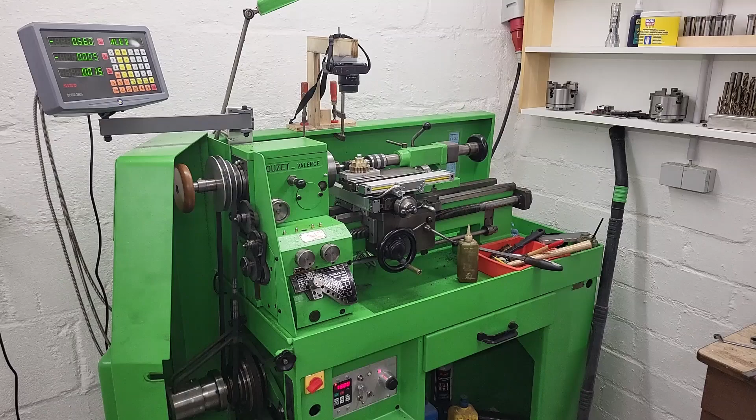This is a Crouzet Valence TC125 lathe. It is really nicely made and I enjoy working with it. I could not find many videos on the lathe on the internet, and most of the owners seem to be located in France. And the internet forums in which there is information are usually in French, which I do not speak.

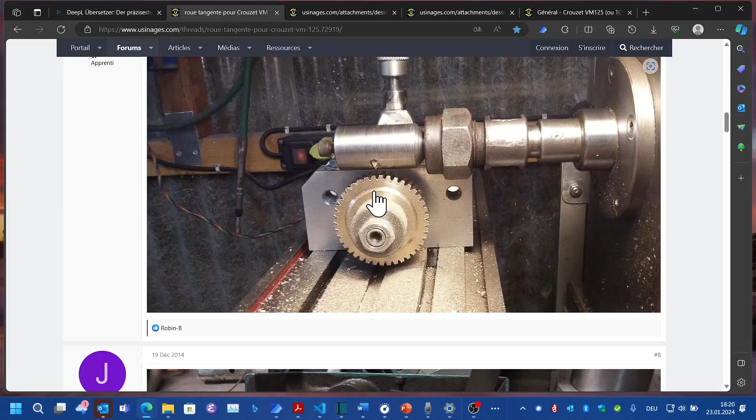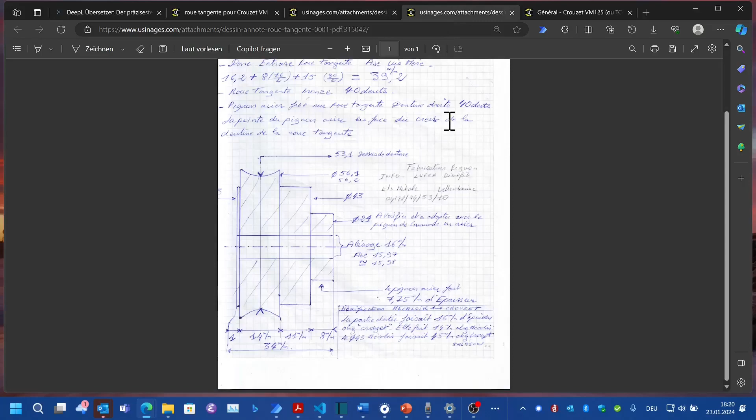When I read through the internet forums, it became clear to me that there is one weak spot of the machine: the gear driven by the lead screw. It is a replacement and alternative construction to a typical half nut and has advantages during normal work. But it takes all the load, no matter whether turning the hand wheel of the y-axis or cutting with mechanical feed. And here my exercise started.

I decided to build my own gear to have a spare part, just in case of a failure in the future. Yes, and this is the result. But it was a long trip, and I want to show the details just in case you also need or want to do the same thing for your lathe.

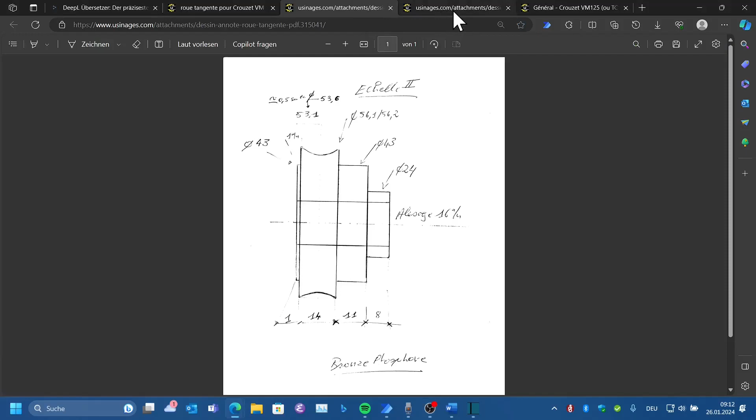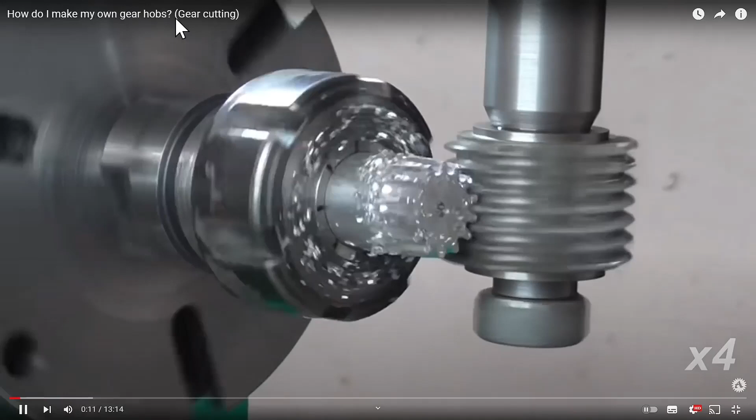I never did gear cutting before, and the first part of the work was the planning and understanding of the different aspects of the task. There is plenty of information on the processing and the exact dimensions in the forum, and I decided to start with this information provided by the user JPC14 and especially Freddy007. These were really useful. Additionally, I watched some videos on the geometry of gears and also read different documents on the same topic to understand gear modules, pitches and all the nice technical terms involved.

I also tried to find a commercially available solution, but the worm gear in the Crouzet Valence is clearly a non-standard gear. Overall, I understood that for a smooth run of the gear, there are many things to obey. Especially the information from the video channel Andy's Machines, which I will link in the video description, helped to understand the differences of the different techniques.

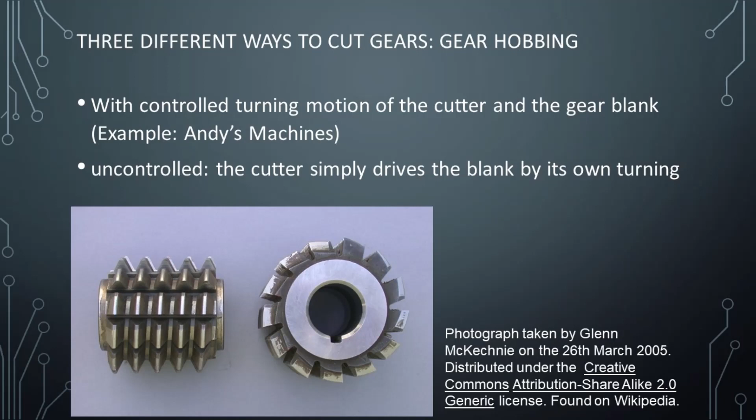Basically, there are three different ways to cut gears. Straight cutting using a manually created cutter or a commercially available cutter, and the gear blank in that case is rotated by a rotary table or using an existing gear, like in the method of JPC14 on the forum.

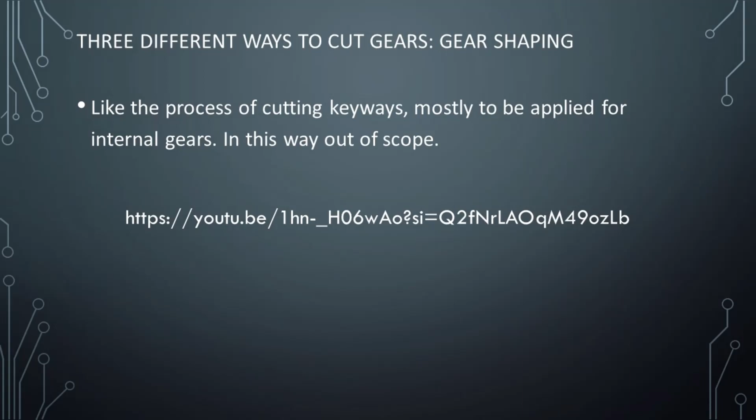Gear cutting using a hob. This can be done using a controlled turning motion of the cutter synchronized with the gear blank, like in the setup used in Andy's Machines, or in an uncontrolled manner where the cutter simply drives the blank by its own turning. And finally, gear shaping, which is a similar process to cutting keyways or internal slots. This is mostly applied for internal gears and in this way out of scope.

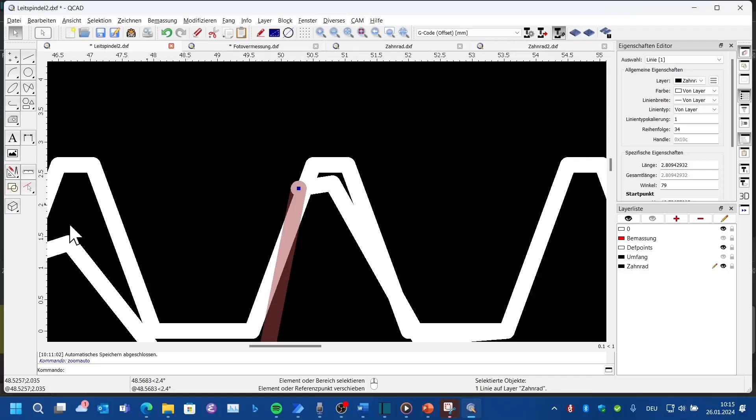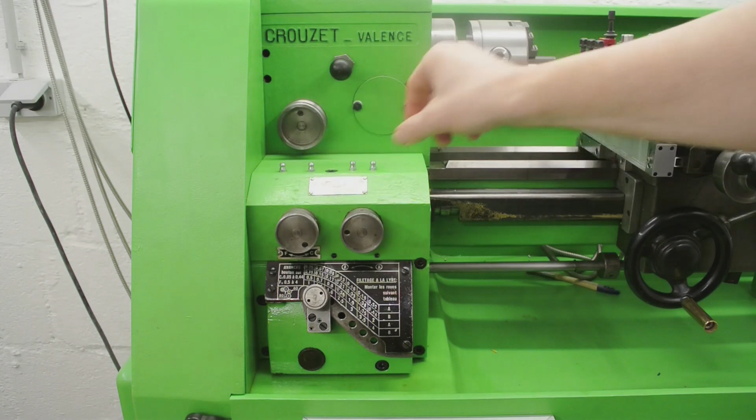From the theory, it becomes clear that gear cutting with a simple straight cutter having the complementary shape of the lead screw will lead to a non-usable gear. The result would be a rough feeling on the hand wheel, or turning will simply be impossible. The reason is that the gears will touch the lead screw when entering and exiting it. You can see this in this picture, where the tip of the worm gear exceeds the limits of the lead screw. Hence, the teeth of the gear have to have not a simple regular, but a complex, partly rounded shape.

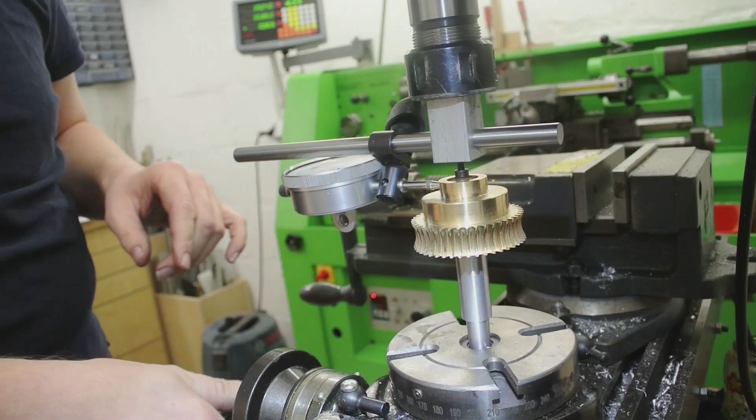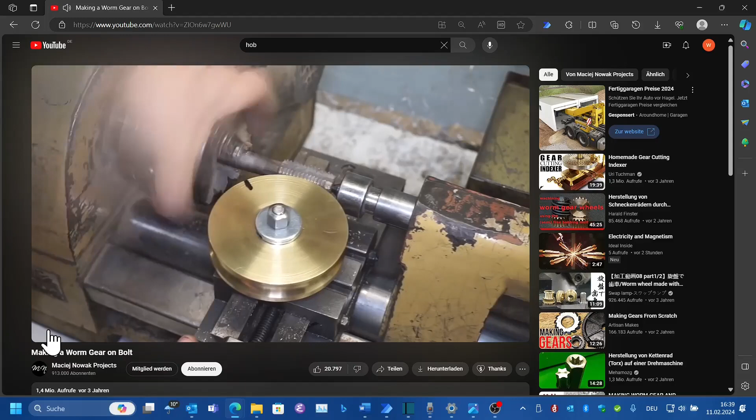So I needed to decide on the technique to use. Building a gear hob seemed to be possible, since the Norton gearbox of the Crouzet Valence allows cutting a thread of 4 mm per revolution, exactly the same as the lead screw of the lathe. Building a straight cutter also seems to be no real issue. Cutting a gear with the gear hob requires hardening the hob, so I needed a technique to harden the steel of the hob. I have only a sloppy rotary table and I did not want to buy a proper dividing head. Also, I did not want to build an electronic drive for the same.

Cutting the blank directly with the hob seemed to be a bad decision. The material of the gear is expensive and the hob needs to be in synchronized motion for an exact result. Hence I decided to go with a two-step process. A straight cutter is used to cut the 40 grooves into the blank, leaving enough material to be removed by the hob. But the straight cutter gives a clear position for every tooth, respectively groove, of the gear, so that there is no problem with inexactness when the hob is used to form the exact form for the teeth. And since I do not trust my sloppy rotary table, I went with the technique of JPC14 to cut the grooves on the milling machine first.

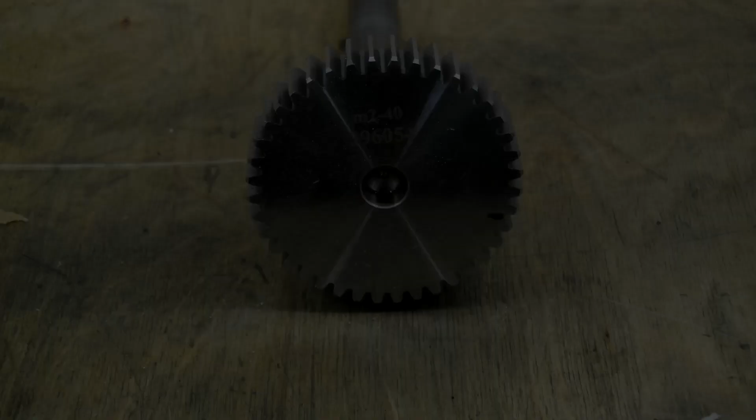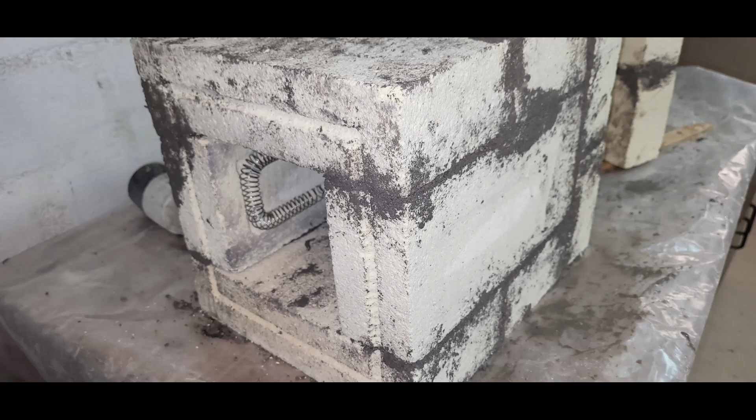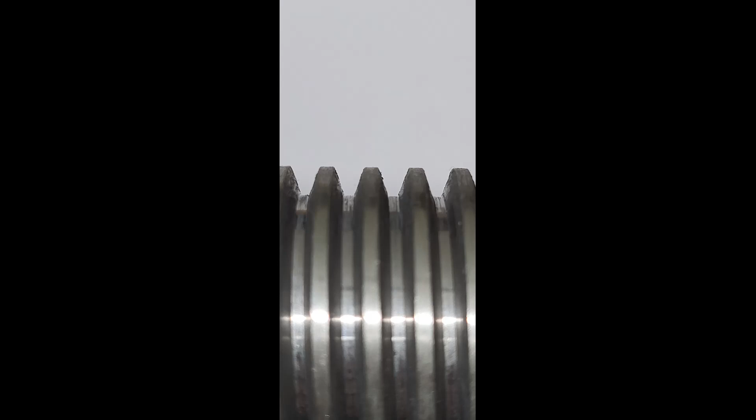Well, and then there was another side project, a hardening oven for the hob, which I always wanted to build, but this is a different topic and not part of this video. Also, it was a key point to be able to grind the cutter to exact shape, so the Tormek T4 whetstone grinder helped a lot to keep exact angles.

After all this planning, the real work started with grinding the cutter at the Tormek. To do this, the lathe's lead screw needed to be measured to determine the angle and depth of the profile. Then the material of the cutter was cut to size, a 12mm hole was bored into it and it was glued to a rod. Then the hob could be cut.

This was really hard. The cuts that could be taken were really shallow, and still I broke the cutter twice, which required regrinding. The overall procedure was taking a complete day, but I learned how to reposition the cutter to match to the existing groove and how to restart the process. I would recommend to get a higher and in that stronger cutter than the 3x6mm cutter blank that I used. It was too weak for the silver steel.

I tried this procedure twice, once in mild steel, which could not be hardened, and the frustrating second time. Practicing the procedure on the mild steel helped a lot. And now let's have a look at what all went wrong, including the original cursing.

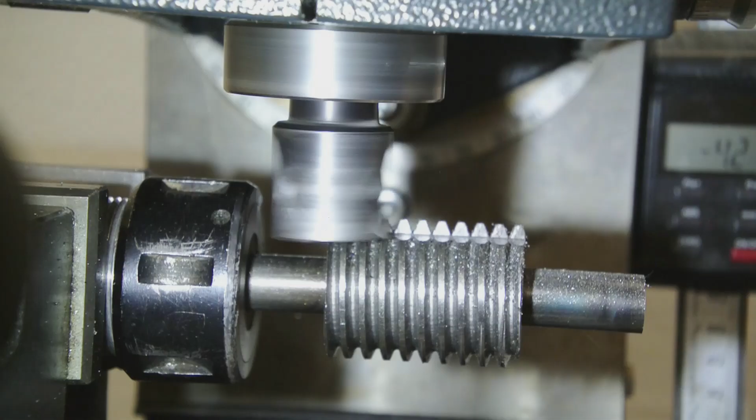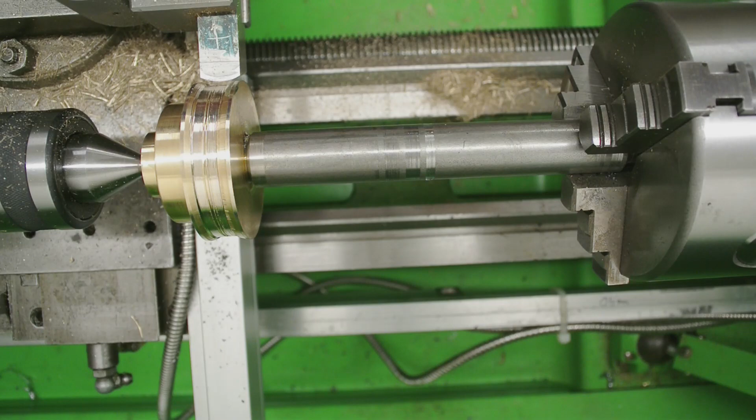And finally the depth of the cut was reached, the hob looked good and was the base for the further processing. All went well. The next step was then to cut grooves into the hob to have cutting edges for the final gear cutting. And then the hob was ready to be hardened.

Then the blank was cut to dimension and brought to size. One issue with the blank is that the 100mm chuck I own can only hold the 43mm dimension in the inside jaws, and the outside jaws do not allow to access the part to be worked on when the blank is holding them. So there was no way than putting the blank on a 20mm rod with Loctite and working on this. And yes, I should have used a shorter one instead of the one which I later used in the milling machine.

My original idea was to cut the rounding into the blank with a 40mm cutter in one pass. By this I would be able to grind the correct rounding to the cutter and transfer this to the blank. Well, this did not work as expected. So in the end I decided to use some CAD modeling to determine some dimensions and cut some grooves to approximate the curve. That, together with some filing, was enough, since anyway the hob would do the rest in the end.

Now it was time to build a straight cutter for the milling machine. There is not much special about this step, and it is described in many videos on the internet. The only thing to obey is that the outer diameter of the cutter shall be 30 mm.

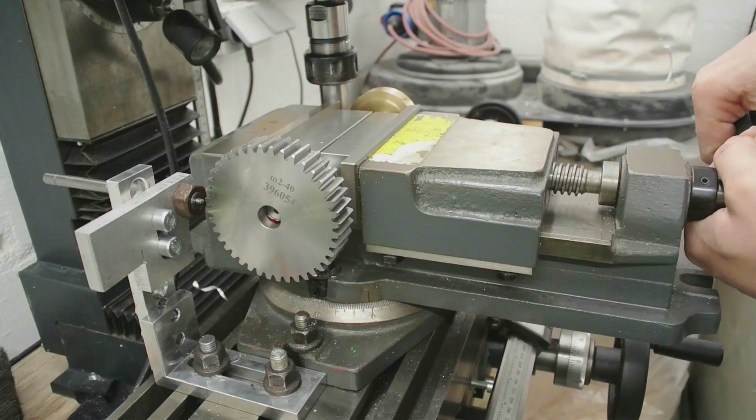Then a clamp for holding a rod with the gear blank on the one side and the 40-tooth gear on the other side was built from a piece of aluminum. This was cut to size, squared, and then a 20 mm hole was drilled in its middle. Finally, the square piece was cut into half at the middle of the 20 mm hole. By this, the rod can be clamped repeatedly in the exact same position in the vise.

Then the angle for the straight cut was determined from the CAD, and the head of the milling machine was set to 3.8 degrees. And finally, the mechanism to advance the gear blank by one tooth could be tried out, and the initial straight cuts could be made. Initially, the progress was somewhat slow, but after building some trust into the overall setup, the progress was okay, and the complete operation was finished in around 40 minutes.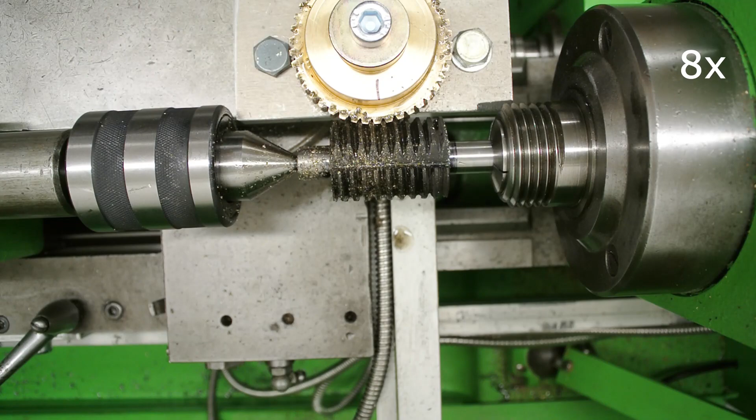Now all parts for the gear hobbing were available and the process was started. This went extremely well. It was absolutely simple and precise. The cuts that were taken were around 1/10 of a millimeter, and running the lathe for 3 rounds of the gear for depth of cut was sufficient. The size of the gear was repeatedly measured, and the procedure went on till the final dimension of the inner diameter was reached.

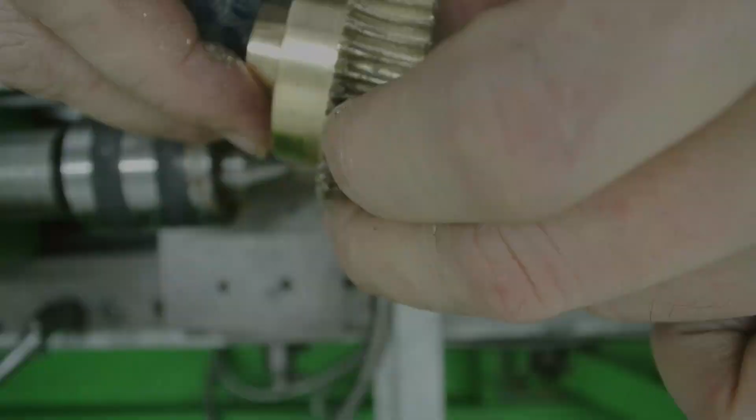The final result was really satisfying. The dimensions are matching the specification and the original gear. What was left to do was to bore the holes for the indexing pins and the screws.

This time I decided to use a rotary table to hold the gear, and I needed to build a tool to find the center position, and a mandrel for the gear to hold the gear in the center point of the rotary table. I will not go into the details of this, and looking back, I would have been better off if I would simply have calculated the positions and used the digital readout of the milling machine to bore the holes. But anyway, the result was good and the final assembly could be started.

Turning the hand wheel was very satisfying since all the work paid off in the end, and even the initial try was a success. None of the expensive bronze was spoiled, some experiences were made, and the Crouzet Valence is ready to go for many years to come.